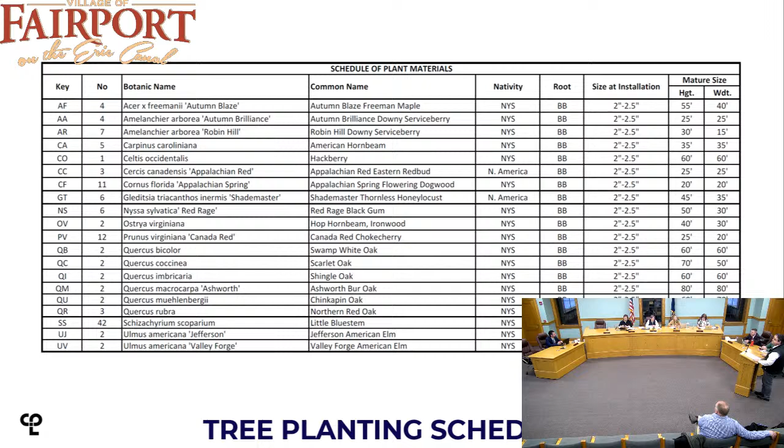The trees are more or less at 40 or 50 feet on center, and at each tree there's a 4x8 tree grate. And then...

Dick, can I interrupt you for a question? Sure. Right now this sample is showing in front of the Village Landing. Whatever the choice is made, is that to continue all the way up and down Main Street, or just a specific location? Well, we try to apply the standard to a specific location, so we would be applying this throughout the business district, but there obviously are variations. In some places the building comes right up to the right-of-way line, in other places it doesn't.

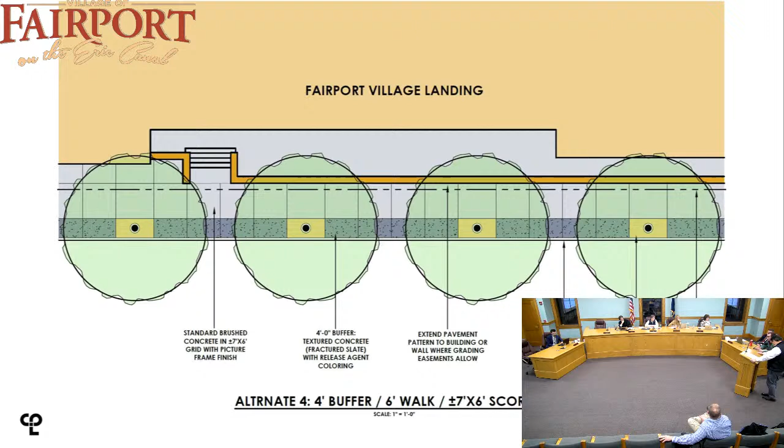One of the other things you think about is just the visual impact. With the change in material, this gives you a 6-foot standard concrete and 4 feet of stamped concrete. If you were to do a 2-foot pattern, it visually opens up a little bit more. You have to walk around the tree grates, but it feels like it gives you a little more space. Yeah, that's a good point.

Is there any concern about having more of the breaks - not breaks, but seams - in terms of cracking in the winters? No, there's not. That's generally viewed as preferred for pedestrian pavements to have more scoring than less. Vehicular, utilitarian pavements are often scored at like 8-foot centers, but more scoring is generally seen as a good thing. These are control joints, so the cut is only made about 1/4 of the depth of the slab. It just controls cracking, and there won't be heaving at these joints.

And what you don't see here is we were also proposing a picture frame finish. So in addition to the control joint every 4 feet, there would be like a 2-inch tooled frame around each 4x4 piece of concrete to give it a nice finished appearance.

Our plans are working diligently to try to pass along this information, so when the contractor's forces are out there, they know what to do. In a perfect world, everything is evenly spaced and perfectly symmetric, but we'll have to work with intermediate driveways and access areas. So this will be the gist of what we're pushing forward, working with the contractor to keep the joints evenly spaced, tree to tree, like Dick had said. The target is 4 feet, but if we work with the contractor to measure the distance, they can figure out what the spacing needs to be to be even and get you close to 4 feet.

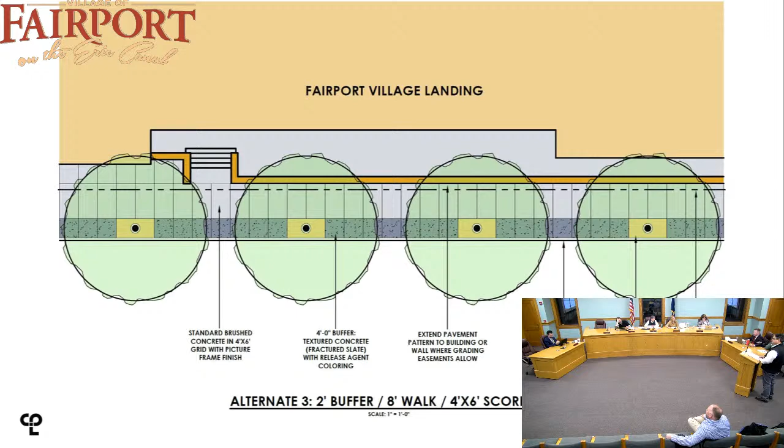Can you go to 3 again? Yeah, this is one. This is two, I feel like I'm at the eye doctor. Three, which has got the 4-foot buffer and the longer longitudinal pieces, I don't like. And then this has just a bigger spacing. So I agree with Adam, and I think Heidi, 2 is my first, 1 is my second.

I'll slash your tires when we get out in the parking lot. It's fine, jeez, stop. Trustee Briggs, what would you like to put down as your choices?

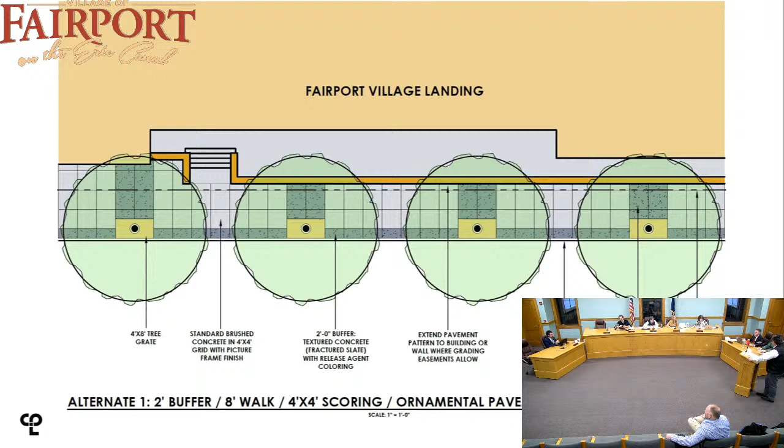My first choice, and I decided when I was home, my first choice is actually number 2, and then number 1 is my second choice, but I could live with either. But I like number 2 better, personally.

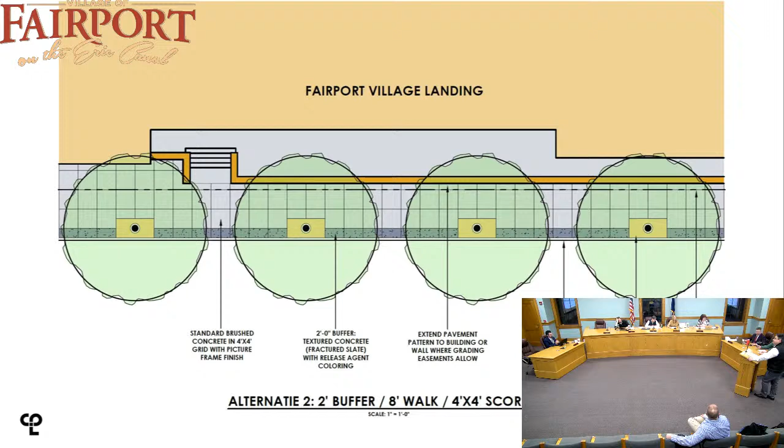So that's our recommendation, but there's others certainly to choose from. Urban Accessories has a nice selection of 4x8 tree grates.

Fan was probably my second choice, followed by the first one, and then these others I liked less. This seems pretty contemporary. I think in Fairport I'd go with something a little more traditional. And there was some discussion about uplights too, if the village wants uplights.

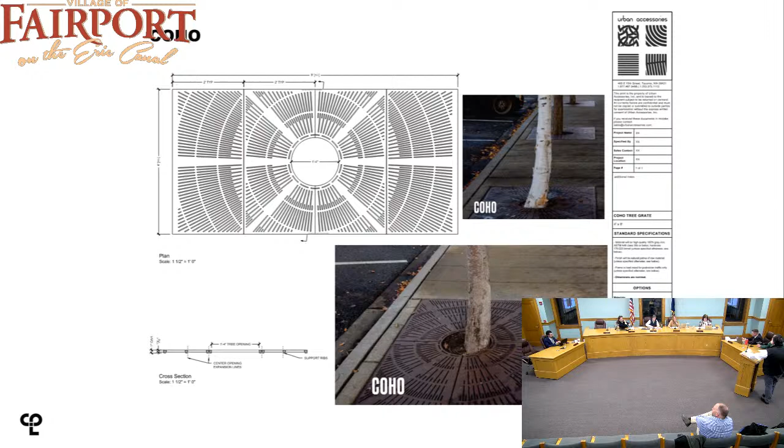Kiva, what's your second choice? I don't have one, I'm just kidding. I guess Coho, but I like Kiva the best.

Trustee Briggs, it's all up to you. I did put some thought into this, a lot of thought into this. If it were to be a circle, I would go with Kiva. And I really like circles, they tend to be playful and they can mimic nature and they kind of radiate some energy. But my first choice would probably be Boston. I love a square, I love the simplicity of it. A square also is very calming and classic, and it has a very strong tradition through arts and through math. It has stability, security, comfort, and I really love the repetition that you get from repeated squares, especially as you're walking down. They create a nice rhythm, and I think it's really classy. And since we started the streetscape, I've been walking around, and now all of a sudden you start noticing things in every community you're in.

Kiva is absolutely everywhere. I think it's the number one go-to. As far as communities out there, I've seen it in the Adirondacks, I've seen it everywhere.

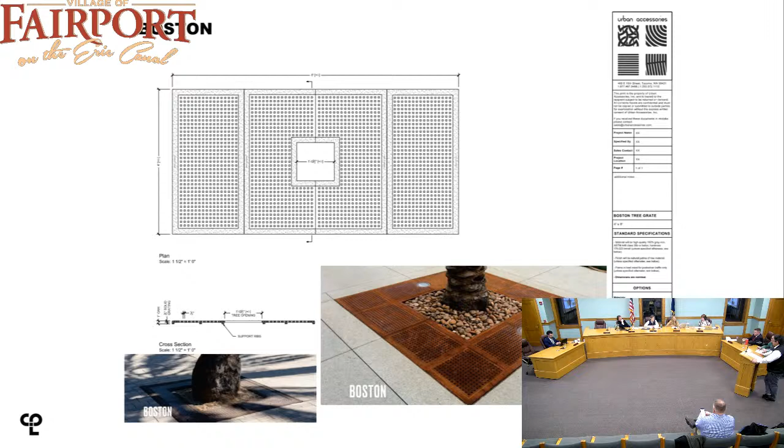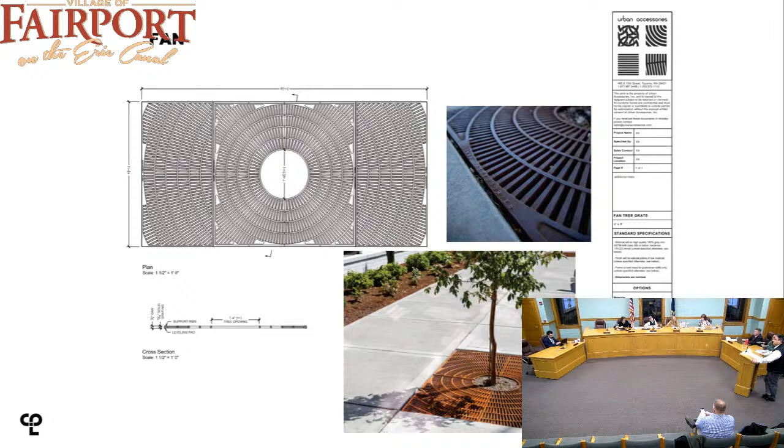May I see the Kiva one more time, the opening? Are those openings defined, or do you say here's how big we need them to be? No, they're defined. It's based on ADA compliance and being high heel friendly.

Oh, I'm sorry, the opening where the tree would go. Oh, that's an off-the-shelf dimension. I can't read that from here, but I think it's a foot and a half, 18 inches. The trees we're specifying mostly have a DBH of 2 to 2.5 inches, so that would allow for many years of growth before there was ever an issue.

And then at that point, do you just buy another one of this design with a larger circle, or find a different product? You 100% can, and even if it isn't necessarily meant to be expandable, I see it all the time where local forces will take the tree grate up and take an angle grinder to take one more ring back. It's very common.

Okay, so I'm going to ask for the last comments. Trustee Mishler, do you want to keep the choices that you made? I would say Kiva, and second choice Boston.

Okay, so I didn't have a second choice really when I first voted. Mine was Kiva and Coho. Yours was Kiva and Coho, and Heidi's was Jameson and Kiva, and Boston Kiva.

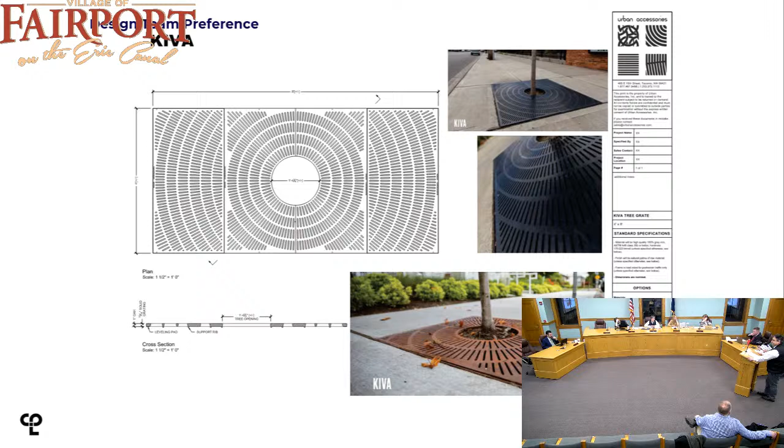So next we looked at where furniture and pedestrian amenities might go along the corridor. Just to note, we only have 10 feet inside from the face of curb to the right of way, and that really doesn't accommodate benches. If you try to put a bench in that 10 feet, it will obstruct pedestrian traffic and/or be in a place where it's dangerous, where you wouldn't want to sit so close to parked cars. So within the right of way, there's not a great place for benches.

Trash receptacles could be located in a variety of different places. Right now I've seen a bunch that are next to light poles, and that can work, but benches not so much. Same with bike racks - they take up an even bigger footprint than benches. But we have identified some locations just outside the right-of-way where some seating niches might be located.

I just want to build off of that a little bit. With the federal aid project and the right-of-way constraints we have, we are limited in how much we can do. With the design of the project - landscape design, hardscape layouts, lighting locations, tree selections - there are some locations where street furniture is best suited outside of the right-of-way, outside of where we can work within the bounds of this project. So we really wanted to take this one step further and not just say this isn't our job, not our problem.

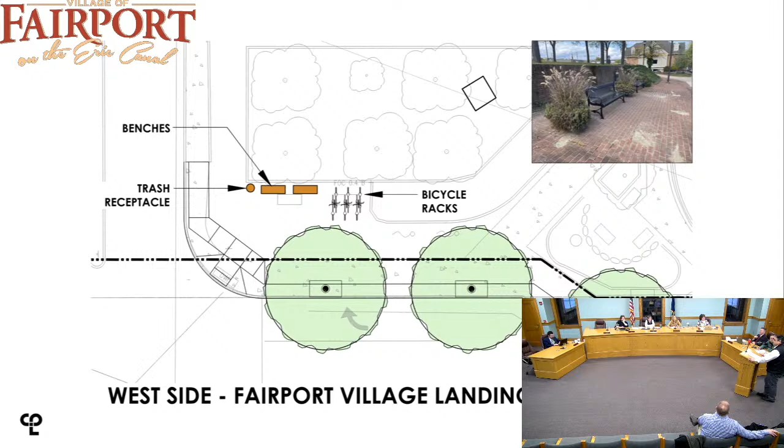We're moving from south to north on the west side of the road. Here's another little niche in front of Village Landing. In each of these slides, there's a photo of the location in addition to the plan view drawing of it. So you could see here, you could take away some of that planting and locate the benches against that wall, or you could even put them in front of that planting.

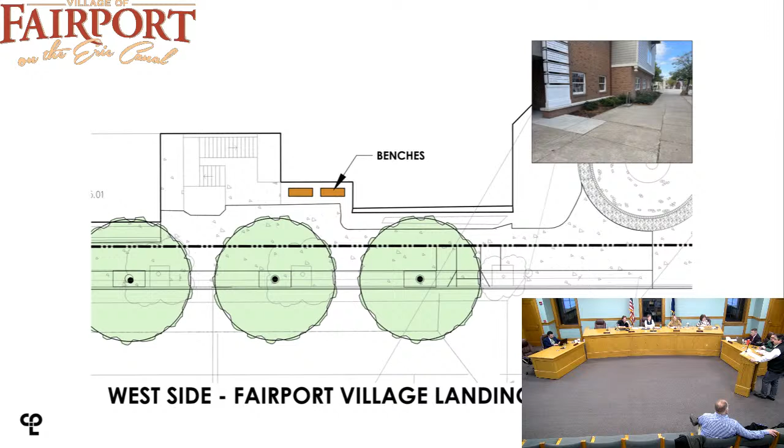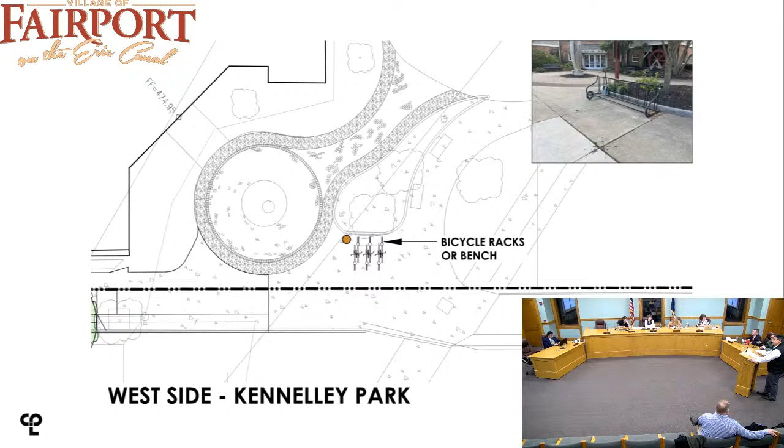But wherever it's privately owned, you would need to have a grading easement to do this. So that's another opportunity up here at Kennelley Park. There, you can see there's a bike rack there. There's plenty of room for a bench and a trash receptacle or a bike rack there.

Moving further up, this is in front of Riki's Family Restaurant. There's already a bike rack there. There's certainly room against that brick wall to locate a couple of benches and some bike racks. We may need to shift the bike racks - I think that's where their door is, is it not?

No, because I know it shows on the corner, but it's actually... Yeah, there's some room beyond the door, between, pretty sure, but maybe I made a mistake there. I'm pretty sure there's room on both sides of the door for amenities. Right, well, either way, it shows we have space. We can figure it out.

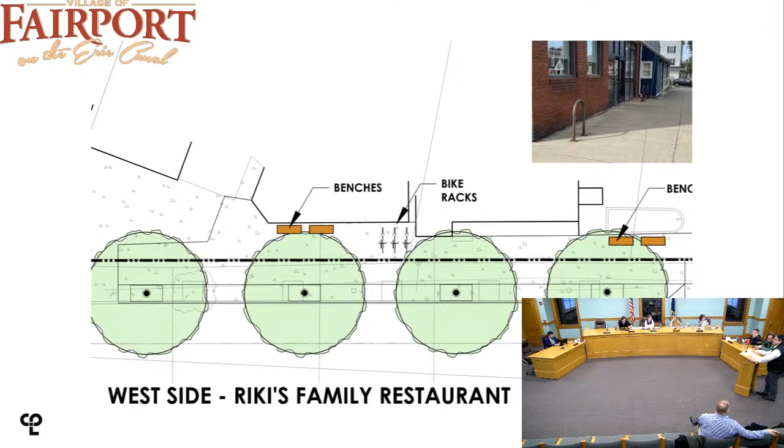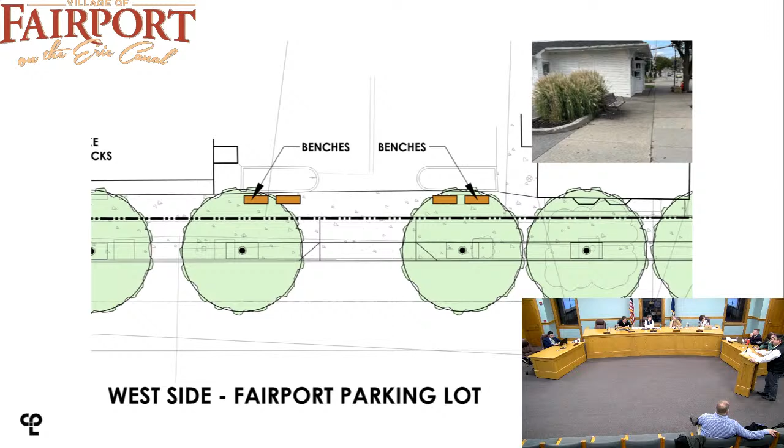And then in front of the village parking lot, there's another location where you could locate some stuff, maybe as many as 4 benches or 2 or 3 benches with a trash receptacle. I believe this is village property just south of the railroad, and I believe there were plans for possibly a future parking lot or something back there. I don't know how.

But does the village own that piece, or does someone else? Out past the highway boundary, it's private property. Okay, got it, well, skip it. It's a possibility there, and you would not have to preclude getting cars back there either. You could locate a couple of benches like this and still get vehicles back there, but it's a possibility.

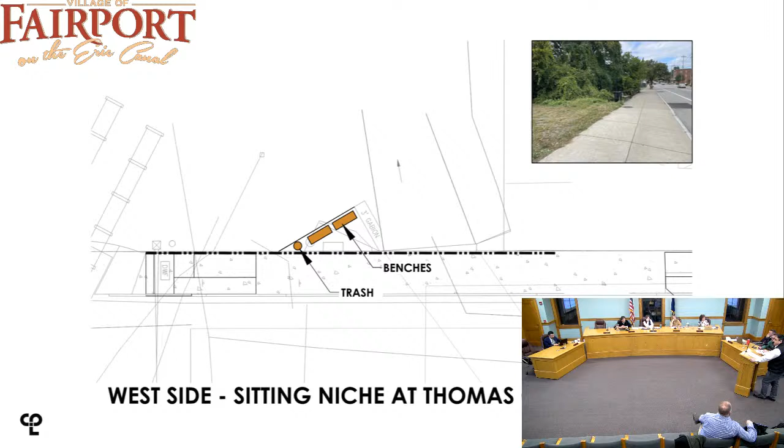This is by Thomas Creek. There's a little niche there now that could be, by my estimation, there's room for a couple of benches there and a trash receptacle.

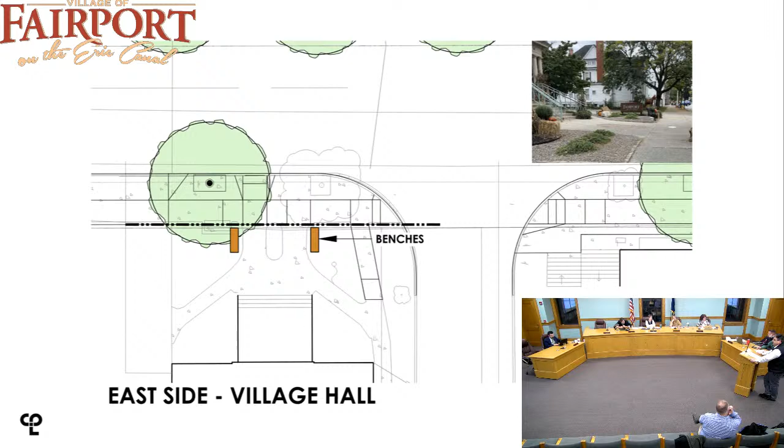This one seems out of place. No, we're back to the beginning. Oh yeah, okay, east and bottom. Oh, we're going east side from south to north, okay. Yeah, at the Village Hall, there's a great opportunity there to expand that little sitting niche. I think a couple of benches flanking the pavement in front of the steps would be nice.

Here in front of the Village parking lot on the east side, again, this is Village land already. You could simply put in some bench pads just outside the right-of-way.

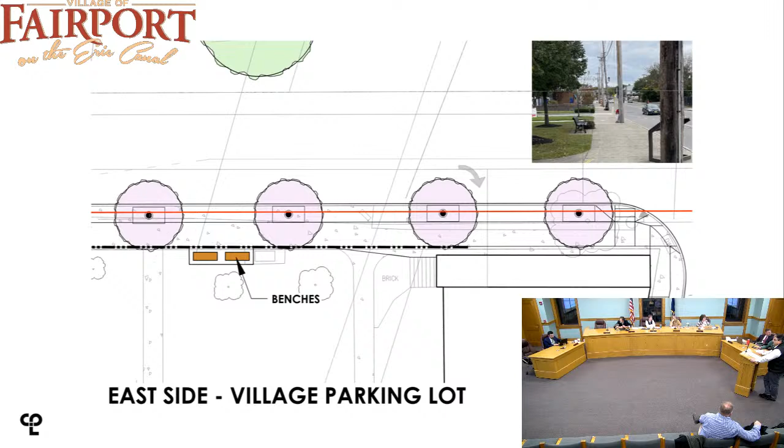This is in front of Lombardi's. You can see there the store owner has some planters out there. There's an opportunity for benches there.

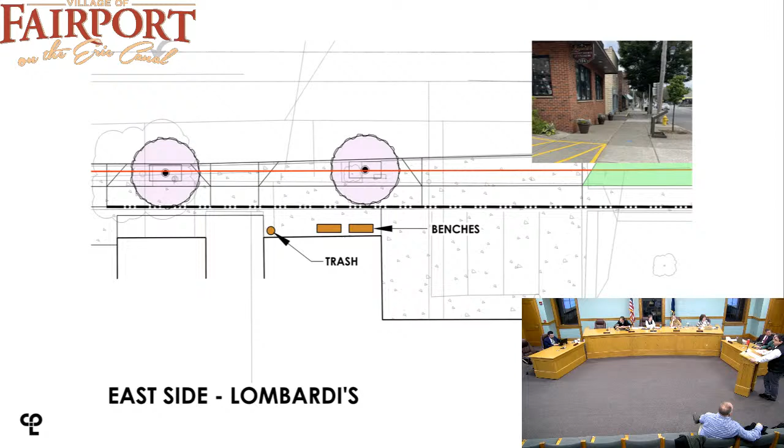And now I'm going to hand off to Dave to talk about street signs.

Can I ask a question - did you send us pictures of what it's going to start like, because it starts down at the corner, right? It starts, the streetscape actually starts beyond Church Street. Is there anything going on in there as far as trees, plants, sidewalks and all that? At the northern end and the southern end, we have tree lawns, and then we transition to tree grates when we get closer to the center of the village.

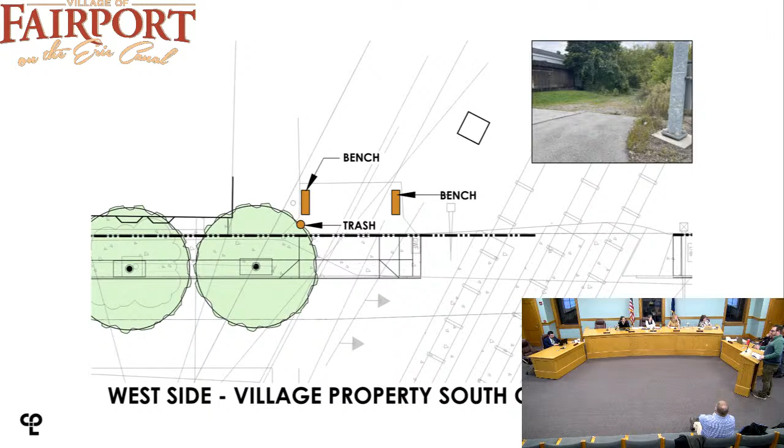That was included on the tree plans. I didn't see it. Yeah, I've got the whole thing here. The new construction, can you scroll in, front to back of Fairport Savings and Loan, or what it's going to look like down by the corner? I don't remember seeing that.

Yeah, so this is the Church Street intersection, and this is kind of where the project starts. As we get into detailed design, we're still sharpening our pencils a little bit, but this is kind of the gist of the project limits. We were capturing approximately where the tire shop is and the gas station, the driveways, kind of starting there and then moving north. On these plans, there are two existing trees that we're going to retain on the southeast corner.

And then moving north, it's a mix of existing trees to remain and proposed trees to be planted. So, but we're going to have the grasscape all the way up to Village Landing? Yeah, you can kind of see on this, it's a little zoomed out, I can't zoom in. But at the entrance to Fairport Village Landing, we basically have grass that comes up to that intersection.

And then north of that is where we would start the hardscape treatment that we were talking about in the four alternatives. That's where things really narrow up. The curb line pushes further away from the center of the road, gets closer to, oh I was just making - Fairport Old Savings and Loan, and then there's the coffee shop going in there. It's just that huge hunk of cement now. But you're actually gonna bring green space all the way up and around that building. So where there is concrete now, we're gonna put in trees and grass.

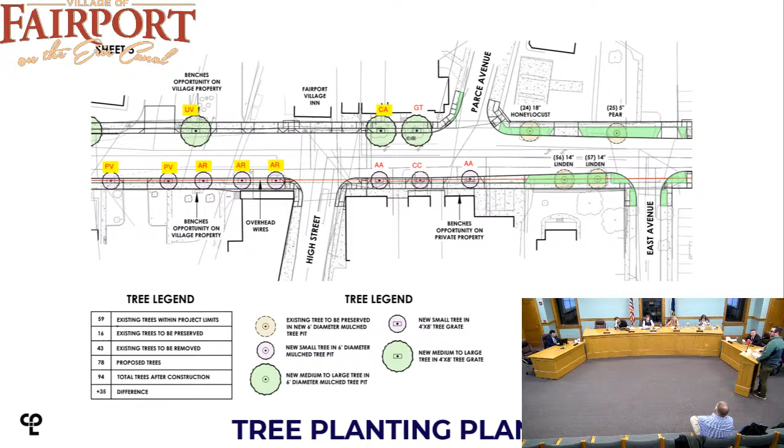Okay, if there aren't any other questions, I can roll into the last part of the conversation tonight.

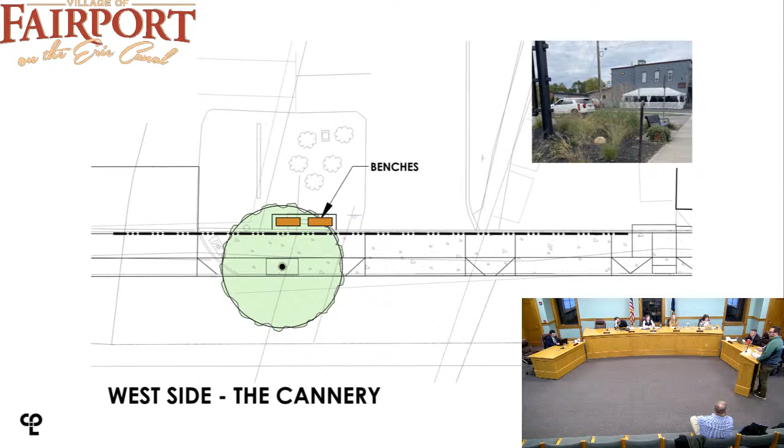Ornamental street signs are part of the streetscape that we have control over with the federal funds and implementation of the project. The standard street signs, stop signs, one-way, parking, those are all standard signs we have to install. Can't deviate, they're part of the standard federal guidance on street signs.

We can go a little further and do decorative signposts with decorative bases, finials, and frames, and try to class things up as much as we can. We're currently in talks with New York State DOT to make sure we're all on the same page with what's going to get installed.

The one part of the project we've been looking at feedback from the village on is ornamental street name signs, placemaking, taking it one step further, signs we actually have some control over, doing something other than standard. This last slide, we've been working with a vendor who was able to do some mock-ups for us, and these are some of the ideas presented to us. We were curious what the village's take has been on what's been presented, the options that are out there, and placemaking and the choices with signage and names.

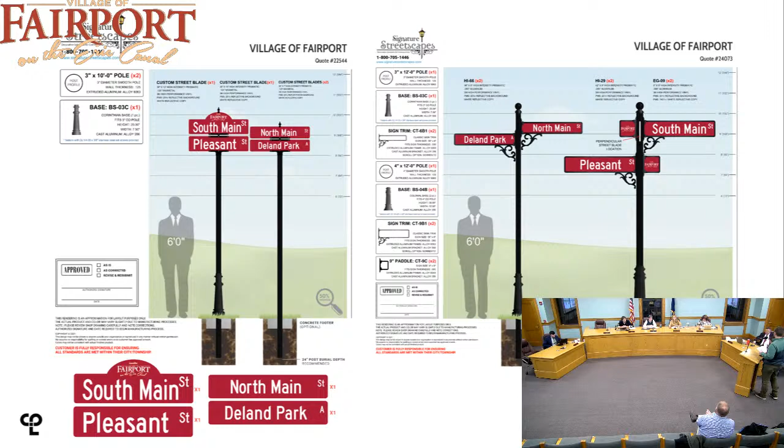Any more questions or comments from the board? You good? Okay, thank you so much. You didn't have anything else that we had to discuss, did you? No. Okay, there's still a lot to do with the project, but we're in the home stretch, and this is important information. I thank you for your time. Thank you so much for going through this with us. We appreciate it. Thank you, have a good night. Okay.

At this point, we will move on to item number 2, which is the parking demand analysis review. Chris is coming up from Fisher Associates. Jill is sitting.

Thank you for coming. Okay, no, it's good. No whispering in class. I see Fisher's. All right, so we're going to move on from tree grates and talk about parking studies. Okay, please, you have the floor. Okay, yes, I just want to clarify, you're just sharing information. We're not decision-making, you're not proposing changes, you're just sharing all your study stuff.

Yes, so the parking study was done as part of the zoning code update, and this information will be used to inform the parking requirements as we develop the code. So at some point, based on the data that we've gathered here, that will inform how the code is written to address parking requirements.

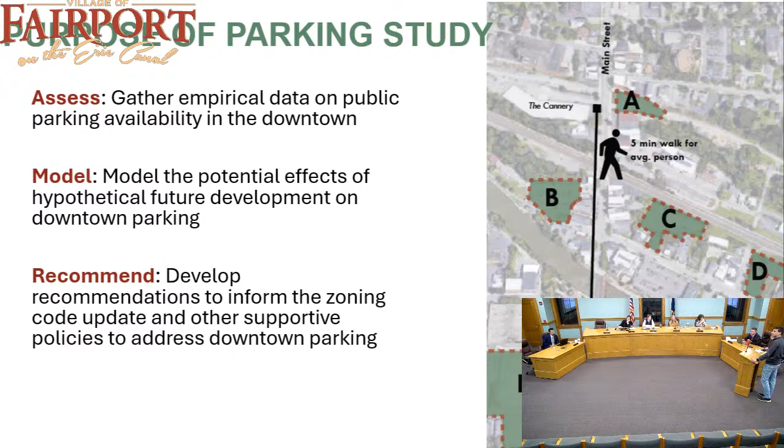So you have approximately 850-ish parking spaces, 855 parking spaces, which has a little bit of approximation because some of the spaces on Main Street are not striped, so there's a little bit of give and take there. Obviously, I think you're all familiar with these lots. This is public parking spaces.

This whole assessment was not looking at any of the private lots that exist within the downtown. Can I ask a follow-on question about public parking spaces? So we're talking about Main Street with 29 approximate on street. Did you consider any of the other side streets off of Main Street, or just the spots on Main Street? For this, we just looked at Main Street itself.

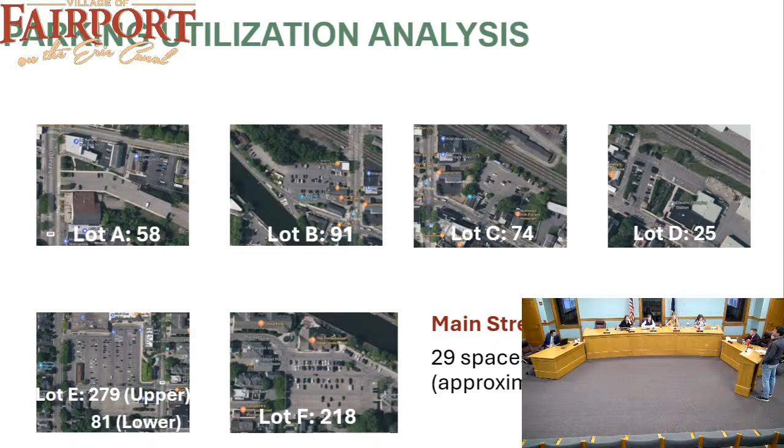Well, I think Main Street's the only place we allow parking year-round, right? Everywhere else, there's no on-street parking between 2 a.m. and 5, from November through April 1st. Even on Main Street? Correct. Yeah, it's the entire village.

I think our study area was dictated by a previous study, so we were sort of mimicking the same extents. To do the analysis, we came out at 2 different times, one in the spring, one in the summer in June. For each of those time periods, we came out twice during that day, once during lunch, once during the evening. Then for each of those periods, we did 2 rounds of counts and averaged them to get more information.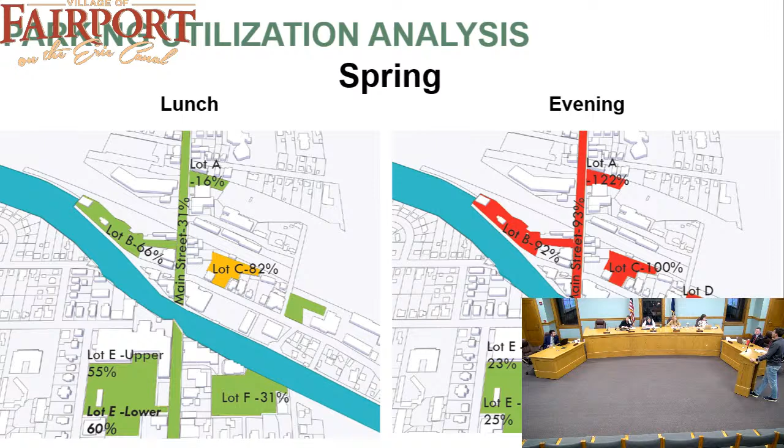On the next slide, we dig down a little bit, because it isn't the same story everywhere in the downtown as a whole. You can look at these graphics that show it visually. This was looking at the spring. On the left is the lunchtime period, and on the right, the evening. You can see essentially north of the canal in the evenings is where the lots get fully utilized, and in some cases beyond fully utilized, because people make up spots that aren't officially spots—120%, 100%. So you can see north of there, and it brings back to what I mentioned earlier: if people are willing to walk 5 minutes or less, for most people there's plenty of parking right on the other side, right around where we're standing today.

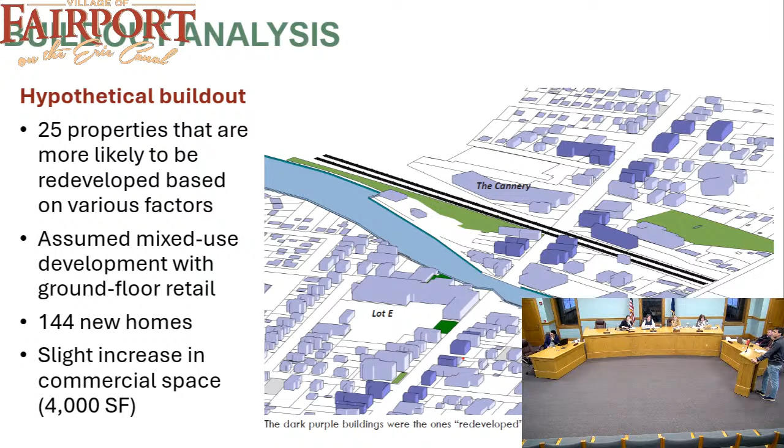So then what we did was we worked with our transportation engineers who developed this model. If you have detailed questions about this model, I'm not the one to answer it, but we have the methodology in the report. Is that with all the formulas? Yes, I skipped that part.

I'd be happy to put you in touch with our engineer if you want to get into the weeds on that. The gist is they have a model developed for the city of Buffalo, for the green code, the form-based code. Their parking strategy utilizes this type of model to determine how much parking is needed for each development. We took that concept and applied it for this broader hypothetical development, and based upon that, it comes out with a demand for approximately 170 parking spaces associated with all of that hypothetical demand.

Just to reiterate, this isn't 170 spaces all at once, this would come over time, incrementally. One reason that's important is we can adapt over the years to changes as needed. If something's working well or not working well, we can always make adjustments to the form-based code or any of the other regulations within the village.

You may not have an answer to this, and that's completely okay, but do you have any idea how long Buffalo has been using these formulas? Is it something that's been around a while, with an opportunity to see how well the modeling works out? It's actually been the last couple of years.

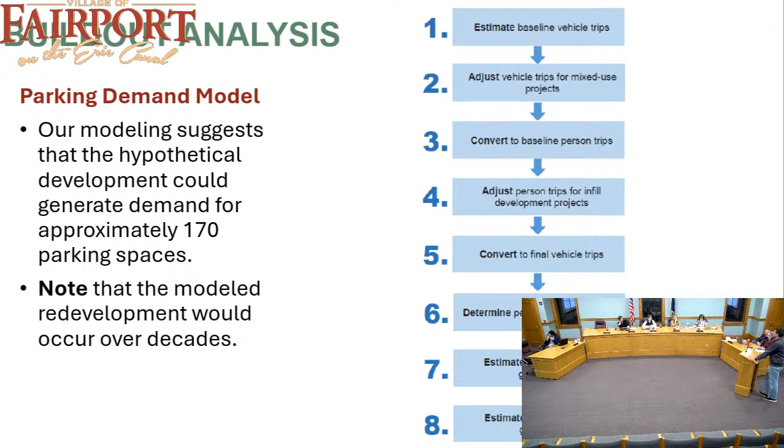I was just curious. Yeah, because over time you start to get some experience with the analysis, and then you go, okay, this was a correct assumption, this wasn't, maybe we need to adjust this. Yeah, I was just curious how it's working out for them. I'd be happy to put you in touch if you want to have the discussions. No, it was just a question.

In terms of the recommendations, it wasn't solely focused on what's relevant to the park, to the zoning code, but we had a few different categories. One category was that you have enough supply, which is something we see often, but what's needed or could be helpful is better management of your existing supply. There are a number of strategies we outlined in the report for consideration. Some of these are longer term, some might be shorter term, and some you might decide are not particularly relevant.

The other big category is this concept of transportation demand management. Part of it is how do you use your existing spaces better? One aspect of that is shared parking. A classic example is a church, which often uses most of its parking spaces on a Sunday, while the rest of the days it's relatively empty. So if a church can come to an agreement with a restaurant, bar, or brewery that needs it more on weekends or evenings, there's an opportunity for a shared parking arrangement.

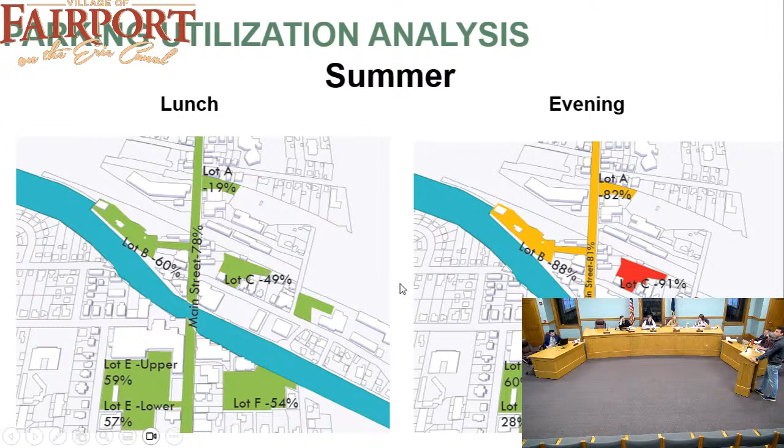When you're getting there, what's fun is actually the Friday after Thanksgiving, hop on social media. There's a whole group of people that take pictures of parking lots on Black Friday, not even full. Not anymore.

So Jill, this is a question I think for you - there are some policy recommendations and some recommendations throughout this study that talk about how do we do better wayfinding, how do we do a better job of communicating where there's available parking. Do you think at some point in the future you'll have some suggestions to bring to the board? I'm sorry if I'm putting you on the spot.

No, that's okay, I think that's something we can definitely do. I think part of it has to be a joint effort between the community and business owners. This study is a great launching point for that discussion with perhaps the partnership and the Merchants Association to say, hey, we've got this data that says during these hours these parking lots tend to be more full, but maybe if you can direct your patrons to the landing parking lot, they'll have an easier time walking.

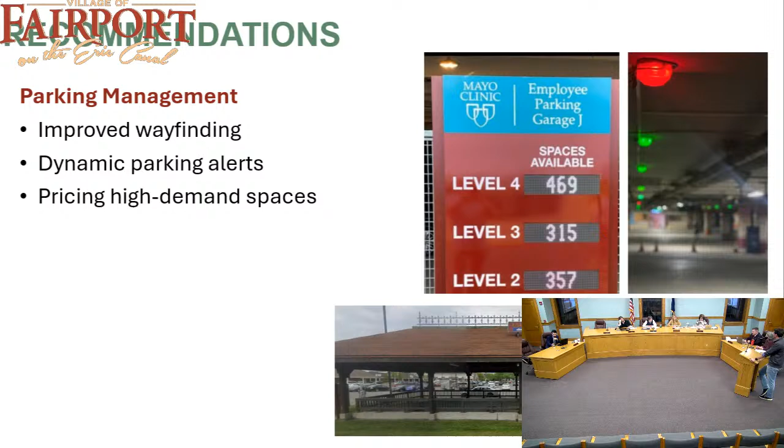I'm going to ask Trustee Briggs, do you have any questions or comments? Not at this time. I think once the team makes recommendations and comes up with some stuff to present, that would be a good time, this is like our background knowledge, to be able to ask really great questions as to how the working team came up with their recommendations.

Well, the recommendations as part of the study are directly from Fisher. So this is a study that's separate, outside of any recommendations from the zoning working group. This information was presented to the zoning working group so that they were aware of the recommendations coming out of this study. I don't know what a good analogy is, this is sort of inside the box but sort of outside the box.

Again, this is to inform how those parking requirements will be drafted, and you'll see that when we present the draft of the zoning code. We'll hit on those highlights of what are the significant changes, and I anticipate that as a direct result of this study, we'll have a different parking section than we do currently.

I know OCED also had a parking study done, but more for just the north side of the village. Correct. And I heard the presentation on that study way back, I think, was it like a year ago now?

If I'm remembering correctly, the recommendations from this study very much mirror the recommendations from that study, and also from the 2010 study that was done originally - it's some of the same conversations. So parking hasn't significantly changed, it's the development in the village that has changed. But keep in mind that a lot of these buildings that we've seen new uses go into are pre-existing buildings, so they've been there forever and likely built without parking.